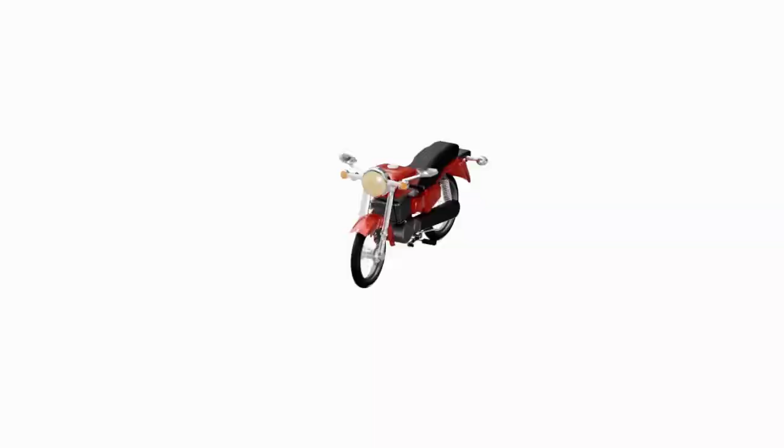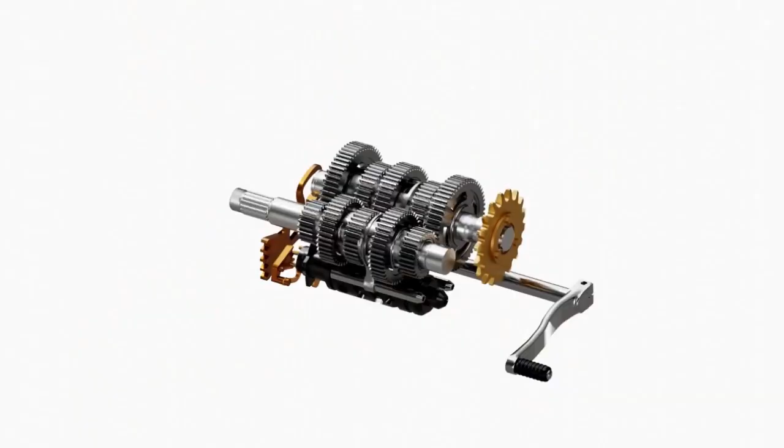In motorcycles, the torque and RPM of a wheel is controlled by manually shifting gear levers up or down with our left foot. The motorcycle gearbox comprises a series of different gear steps, which can be switched according to the requirement. The gear lever is connected to a shifter shaft, and the other end of the shifter shaft is connected to a ratchet mechanism. This ratchet mechanism activates as shown in the animation.

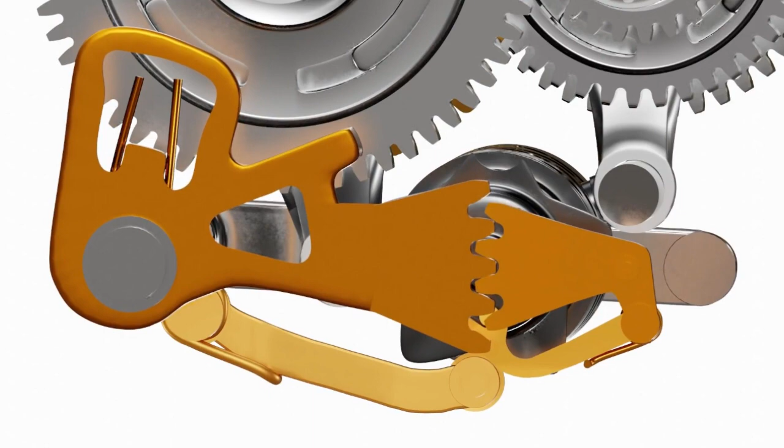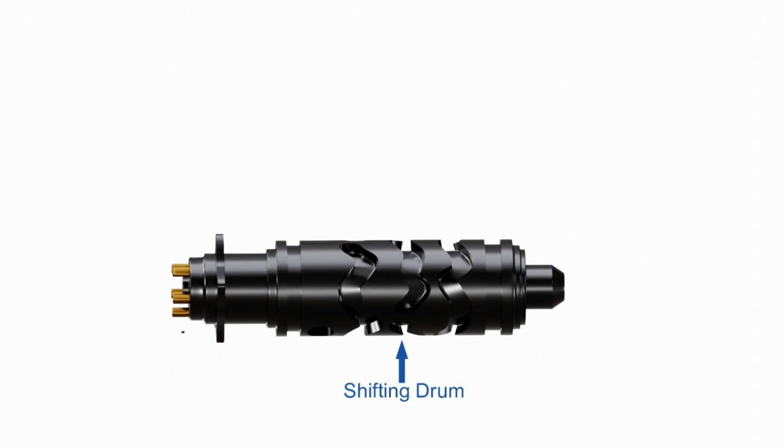The purpose of this ratchet mechanism is to rotate the shifting drum at specific angles. The shifting drum has special shaped channels cut into it. Special attachments known as shifting forks fit into these channels.

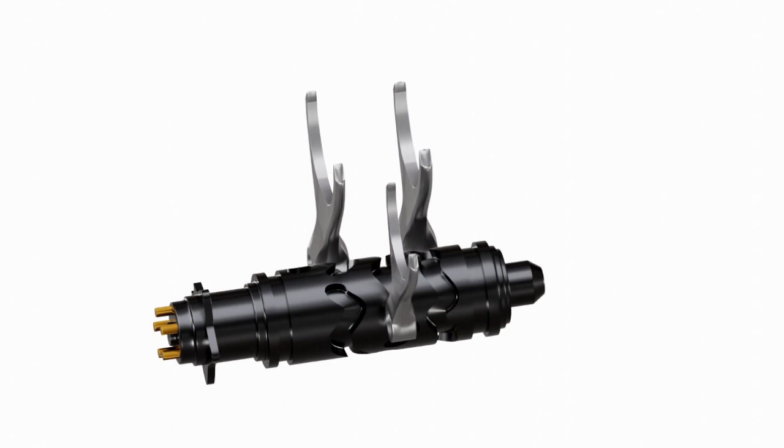Gears known as gear dogs or dog clutches fit into these shifting forks. As the shifting drum rotates, the shifting fork, along with gear dogs, slides sideways as shown in the animation. The purpose of sliding dog clutches will be explained shortly.

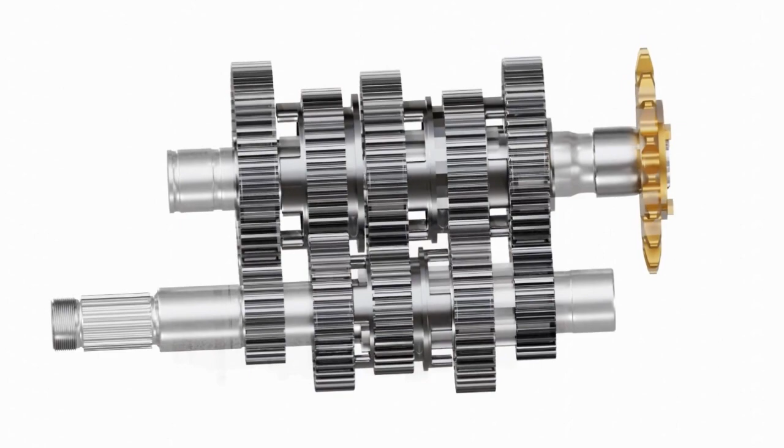First, let's understand the arrangement of different gears in the gearbox. There's an input shaft and an output shaft. The gears are arranged with their axes aligned to their respective shafts. Some gears are internally splined.

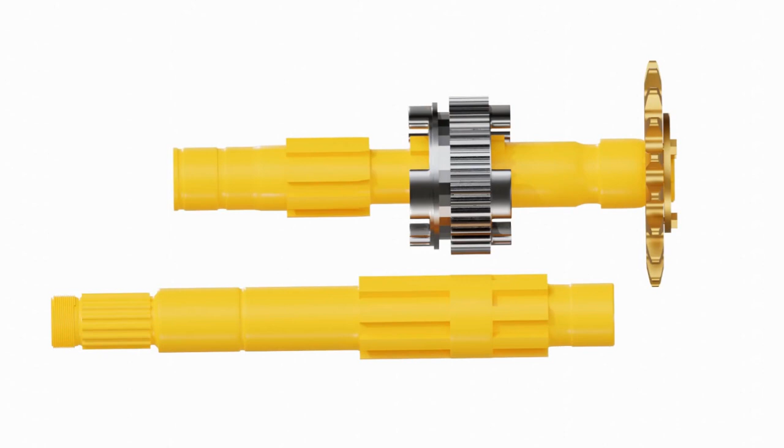These splines perfectly mesh with external splines of their respective shafts. These splines allow gears to slide from side to side while maintaining the same angular speed as the shaft. All gears shown here in yellow color are splined.

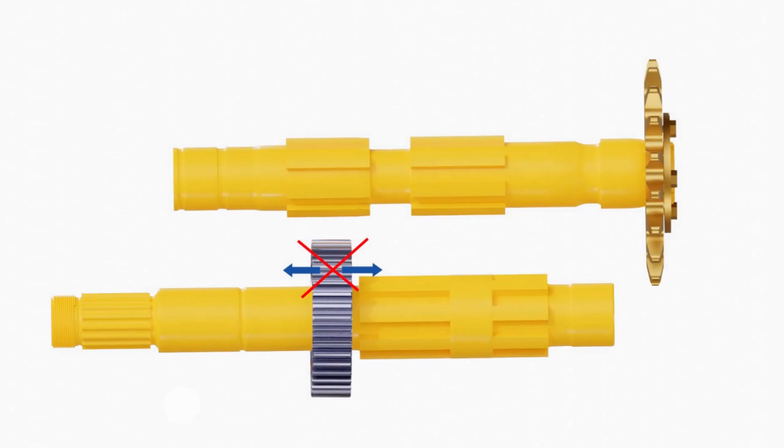Some gears are freewheeling gears. These gears can freely spin about their axes, but cannot slide sideways along the shaft. Gears shown in blue color are freewheeling gears. The remaining gear is a static gear, which is attached to the input shaft.

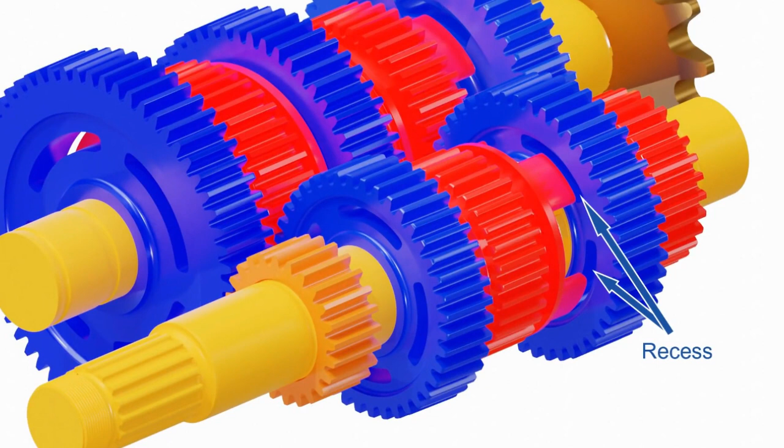Let's number all these gears from 1 to 5 for better visualization. Please note that all freewheeling gears adjacent to dog clutches have recesses. The dog teeth can slide into these recesses and lock these two gears with each other. Now let's see how power is transferred with different gear ratios in a gearbox.

One thing you can observe here is that every splined gear is meshed with a freewheeling gear. In this condition, if we spin the input shaft, no power is transferred to the output shaft. This is the neutral position of the motorcycle.

To change into first gear, the gear dog number 5 on the output side slides toward the freewheeling gear number 1 and locks with it. Since gear number 5 is splined, the output shaft will now spin with this gear. This is the first gear.

When we change to second gear, the gear dog number 5 in the output shaft returns to the neutral position, and gear dog number 4 slides toward gear number 2 and locks with it.

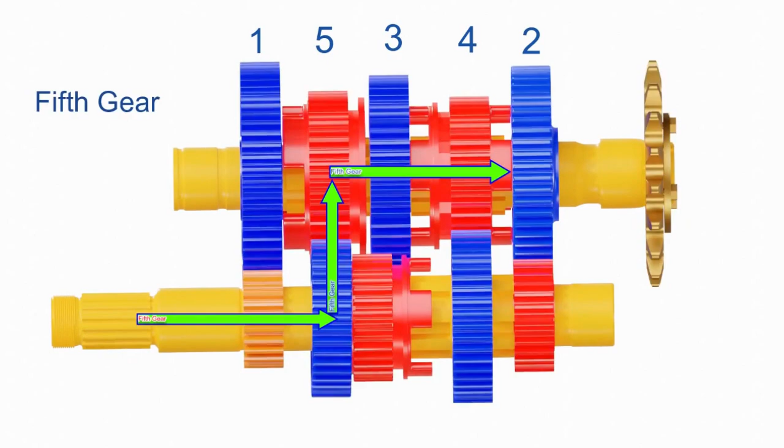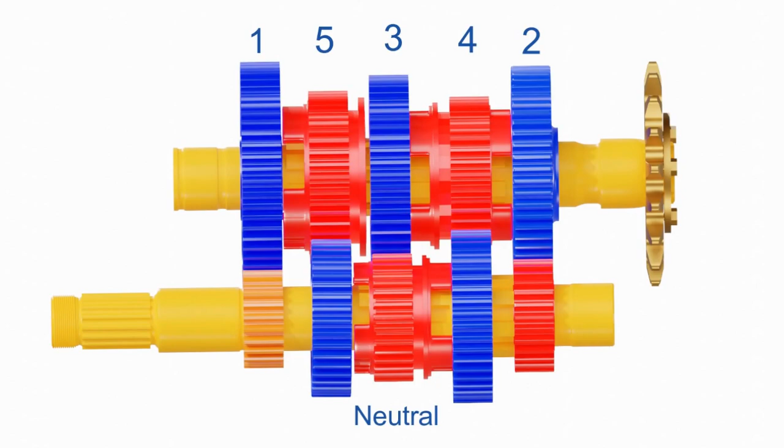The technique is similar when we shift to third gear, the fourth gear, and the fifth gear. Please note here that before shifting from one gear to the other, the previously locked gear dog returns to the neutral position first. Only then it slides into another recess to achieve power transmission. This is why there is a neutral in between every successive gear.

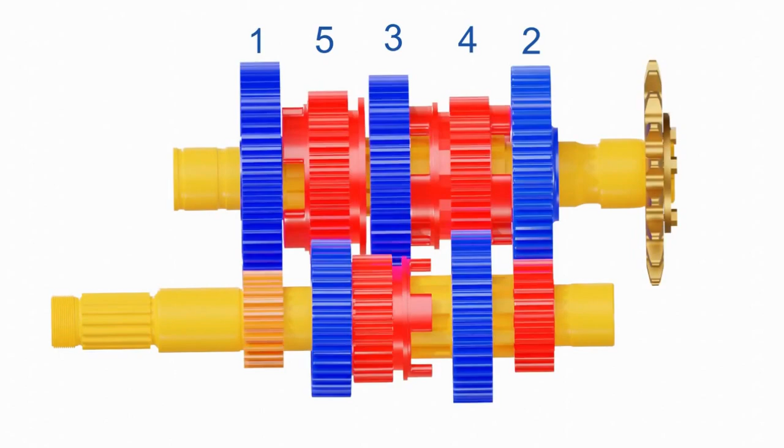But in real life, we find the neutral position only in between first and second gears. To understand how this happens, let's go back to our ratchet mechanism.

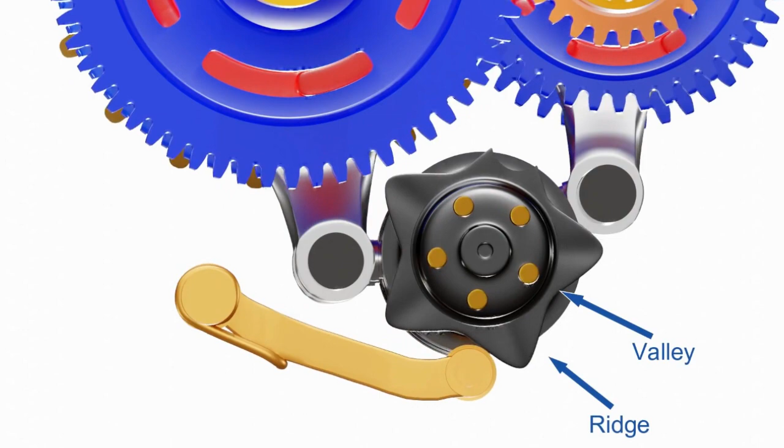A star shift detent mechanism is responsible for proper shifting of gears. As we can see, the star plate has ridges and valleys. A spring-biased roller rolls onto these ridges and valleys. The position of the roller at each ridge of the star corresponds to the neutral condition.

As we can visualize, the roller cannot rest on the ridges of the star and immediately disposes to the appropriate valley, preventing the shifting drum from stopping at the neutral position. But one of the ridges of this plate is ground off, as we can see here.

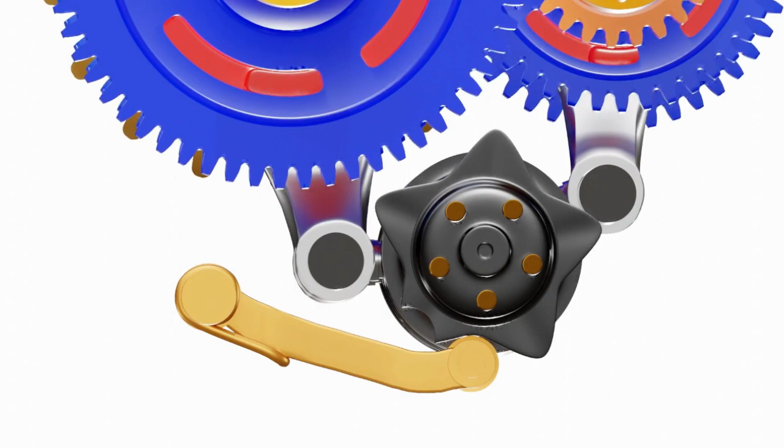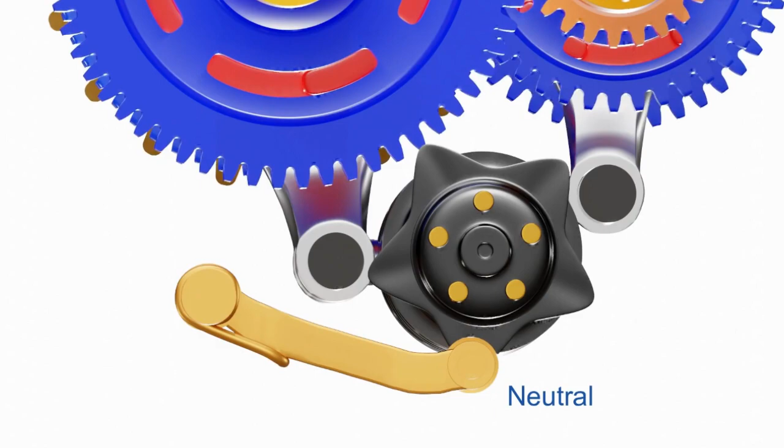This is done in between first and second gears so that the roller can briefly rest on this ground off surface, thus enabling the shifter drum to stop at the neutral position instead of shifting directly to second gear. The transmission system we showed here is known as constant mesh transmission system because all gears remain engaged

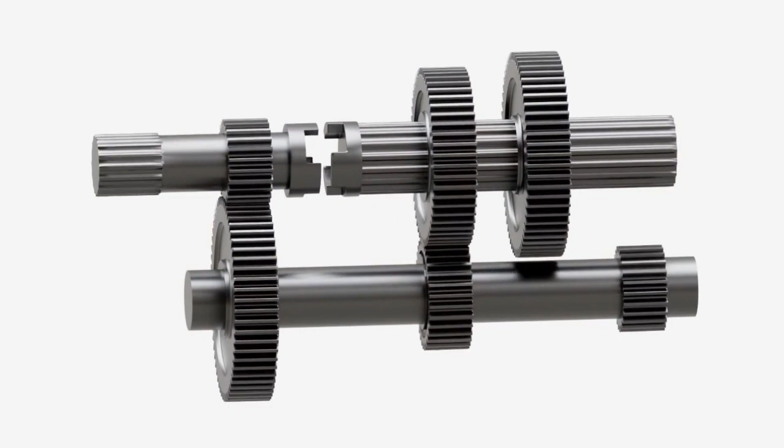with each corresponding gear mate at all times. In conventional sliding mesh transmission, gear shifting is done by completely disengaging a gear with one gear and re-engaging it with another. It involves complex mechanisms and drivers need tremendous skill to operate them.

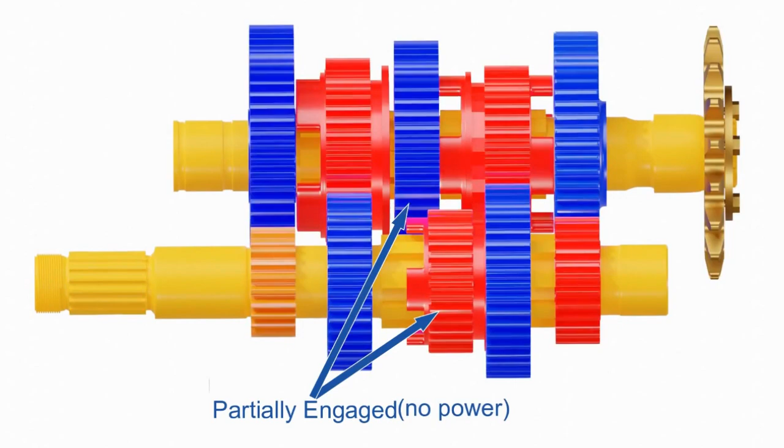In addition, imperfect meshing causes gear teeth to grind and wear. The constant mesh transmission completely eliminates this problem, as you might have noticed that some gears are only partially engaged sometimes. But this is not a problem because they are not transmitting power at this moment. Only those gears which are transmitting power need to be fully engaged at that instant.